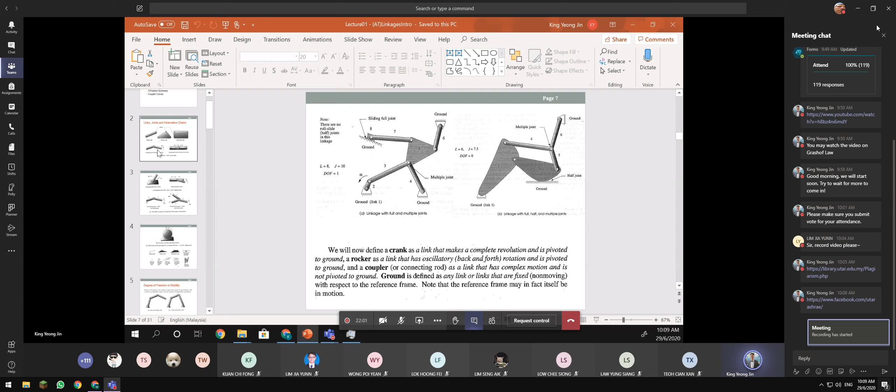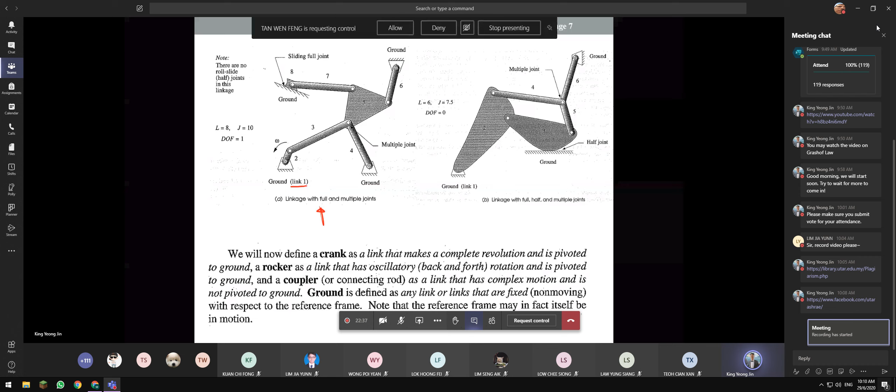Maybe we can look at this example. Let's see - for example, now we look at this diagram. We have so many linkages there, right? So again, you'll find out that the ground link is considered one of the links, because if you look at this part, this part, this part, and this part, their dimension is fixed between them.

So that's why we can actually consider this is one of the links - we call it link 1. Then we have link 2, link 3, 4, where is the one - 5, 6, 7, 8. So 8 is a sliding slider, right? This is what we call a link. So if we calculate it, that's why we get 8 links there.

So now we look at the joint. When we say joint, there is a full joint and a half joint. Full joint basically means that you only have 1 degree of freedom on the joint, in another way of saying it.

So if you look here, link 2 and link 1, or the ground, you can only attach with a pin, so you can only have one rotation motion - you can't have any translation motion and so on. Also, remember we are now on 2-dimensional problems, not 3-dimensional. So this one lays on the screen or paper, so it can only rotate on the axis coming out from the screen. X and Y are fixed because this is a pin joint, so that's why we have 1.

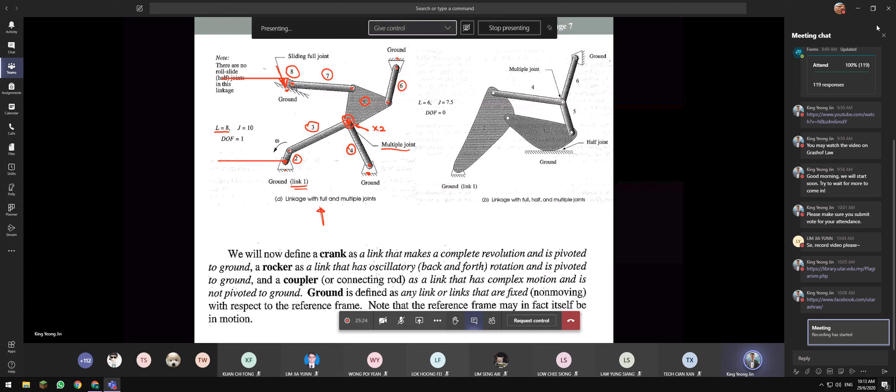Because this is a slider, you can only slide in this direction, so that's why you have a 1 degree of freedom system. That's why the sliding is considered a full joint here. So we have 8 links, then we add 1 more to get 9, and the sliding is the 10th, so that's why we get 10 joints there.

So there is no half joint here. We will look at the half joint on the diagram next to it. So you just substitute all these values.

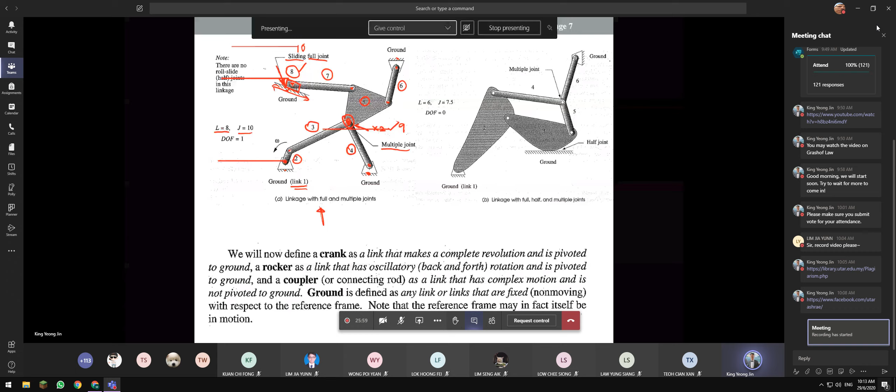To the equations we have. So for example, this one you substitute, this is the 8 link, and this is a 10 joint, this is 0. So we will get 21 minus 20 minus 0. So you will get this... sorry, it should be 1. So we will get 1 degree of freedom system.

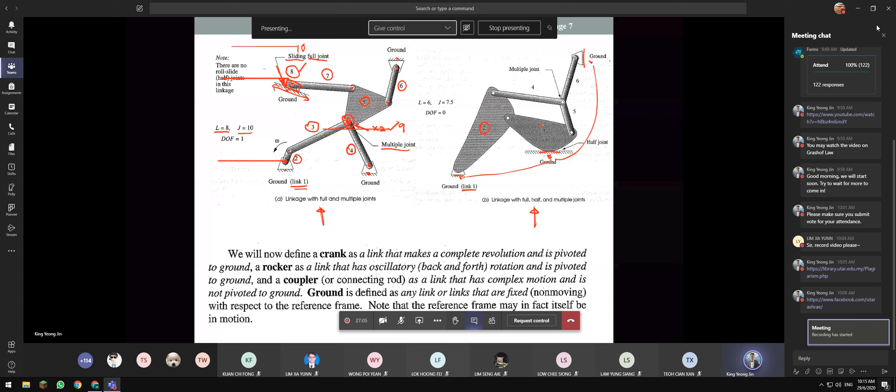Okay, so that is diagram A. Now if we move on to diagram B, you look at the ground here, considered as 1 link, because the measurement from here to here, and to here, they are all fixed. So we have ground as one of the links. So 1, then 2, 3, 4, 5, 6. So we have 6 links there. Then we find the pin joints.

So we have 1, 2, 3, 4. This one is multiple — you can see if I fix this, then I can move this one and this one. So instead of calculating this as one full joint, we say this is a two full joint. So now we have 1, 2, 3, 4, 5, 6, 7. So we have 7 full joints.

So now there is a contact here. So if you see the things that we have here now for this part, it's different from the slider that we have on the left, because that slider only does sliding. But for this link, the link on this diagram, it can actually rotate, it can rotate on this surface, but then this contact can also move horizontally.

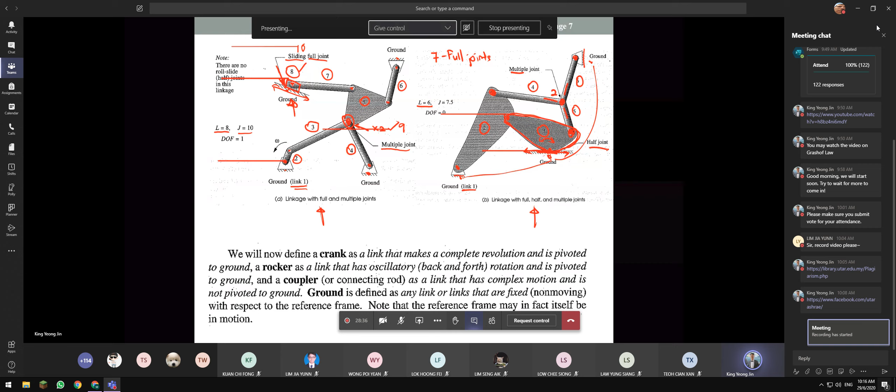That's why we call this a half joint. So half joint, how we denote that is... just a second. So we have one half joint.

Okay, so then if we move back to look at this, let's see what we have. So we have 6 links, 7 full joints, and 1 half joint. So what we get here is this is 15, this is 14, this is 1. So in the end we get 0. So what does it mean with 0?

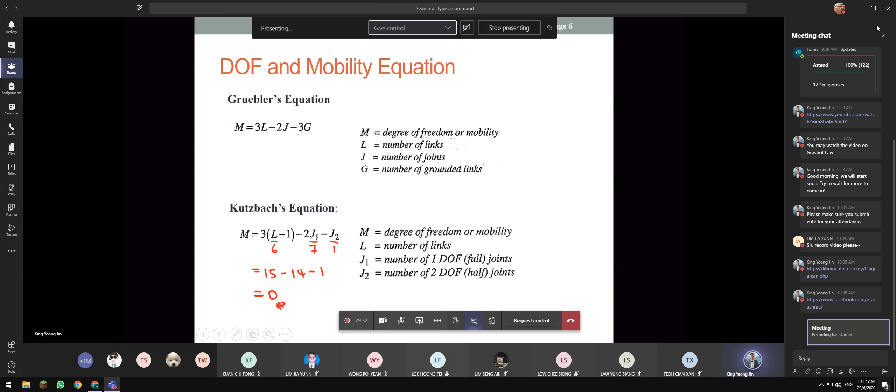It means that if you set up this linkage in this way, basically you can't move it. So it becomes a rigid part, there is no motion you can do. You cannot, when you push here, it will not move. Or even if you push here, it will not move. That's why your degree of freedom is 0.

But for this one, you just need one movement to define the rest of the movement of the linkage. So we read the sentence at the bottom there. We will now define a crank as a link that makes a complete revolution and is pivoted to the ground. A rocker is a link that has oscillatory back and forth rotation and is pivoted to ground. And a coupler, or the connecting rod, is a link that has complex motion and is not pivoted to the ground. So ground is defined as any link or links that are fixed, non-moving, with respect to the reference frame.

Note that the reference frame may in fact itself be in motion. So what it means here is this ground, even though now we say it is a ground, there is a possibility it is a moving ground.

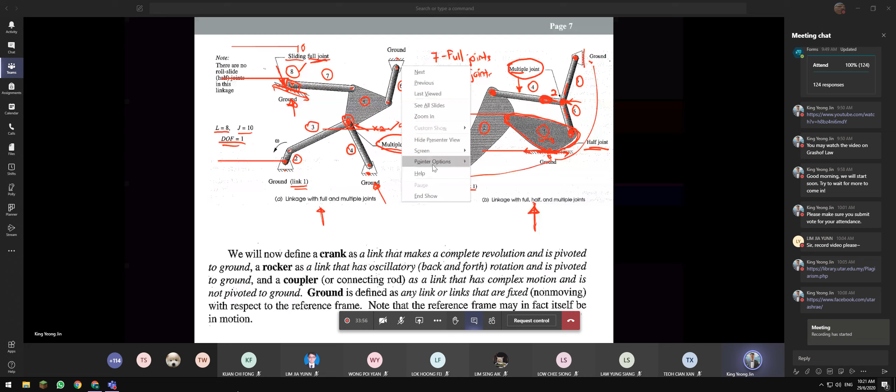At the beginning of the chat, I shared a YouTube video that describes to you the Grashof law. This applies basically to 4-bar linkages, so you can watch the video. As we tried last week already, when I show you the YouTube video it doesn't really work through Microsoft Teams, so you can watch it on your own. It's just a 9 minute fast video.

Now, if you imagine that I turn this, I rotate this, so I will move this point to this direction, this point to this direction. What happens here is, that's why we call this one rocker, because it's only doing rocking, right?

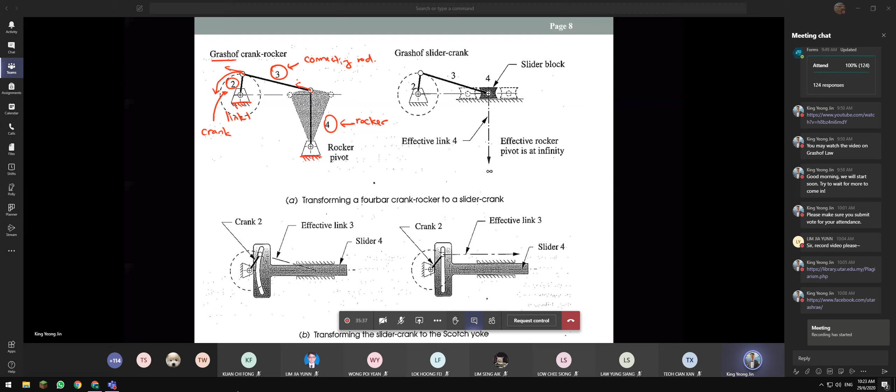This one we call it link 2, normally we call it crank. And this one we call it connecting rod. So if my crank now rotates, then this one, link 4, will do the rocking. That's why you call it crank rocker.

We can have another setup, same as the piston that I showed you in the engine, they call it slider crank linkage. Again the ground is link 1, so link 2 is the crank. If you rotate it, you'll find that your slider block will move forward and backward. The link 3 here is a connecting rod, connecting the end of link 2 to the piston.

The next one, if you look at that, we have this special profile here. But at any single moment, we can actually fix it, and then we can draw the linkages as well. Because if you see here, there is a groove here, and this pin will move along the groove when the crank link 2 is rotating.

If I freeze it at this position, now I can say that my ground is link 1, and this is my link 2. I just take the measurement from this point to the center of the bar there, so I can connect, and then this will form what we call an effective link. The red color one is the effective link, because that is the place where you actually contribute to the kinematics calculation. And then there is a sliding, so we can call that slider 4.

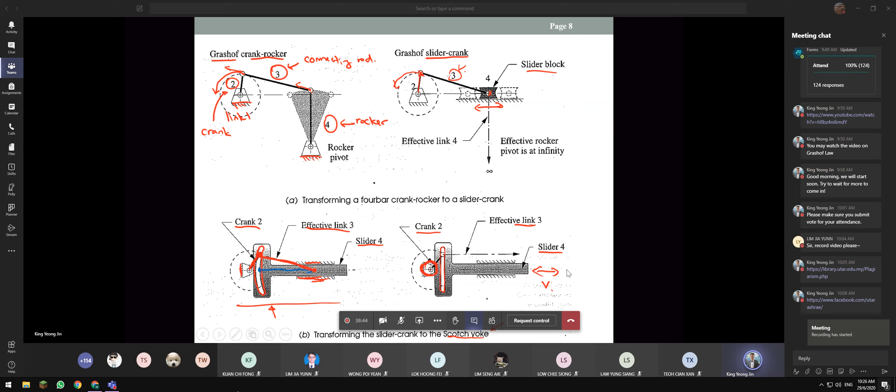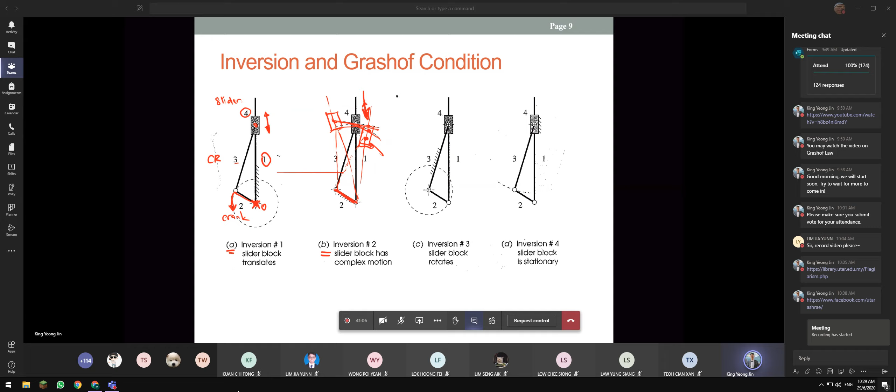For C, what happens if I fix link 3? Then again, my link 2 will do a rotation. When you do rotation, this bar will go up and down, and also it will rotate on that point - this point, because you can try to plot it. For example, now I move to this point, so I have this link here. So what happened here is now I will get that there. Your sliders will actually rotate into this direction.

Now we can look at the last one here, D. So now what happens if I fix the slider here? When I fix the slider here, the link 3 will now rotate based on the P point there. So this is with the same link - if we set different boundary conditions to it, we will get different motion.

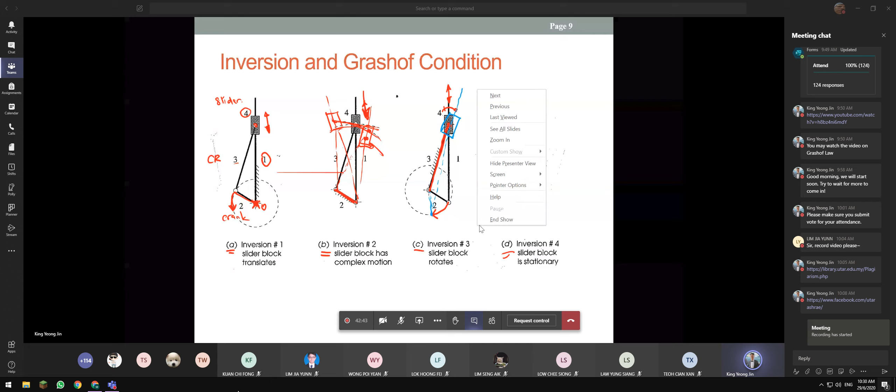Now we look at the Grashof condition. It's a relationship that predicts the rotation behavior of a 4-bar linkage. Before we look into the linkage, a few terminology you have to know: S is the shortest link, L is the longest link, and then P and Q are the other two links. In the video we also explain on this.

Now if we look at case 1, what happened here is the shortest link plus the longest link is less than the other two links. If you look at here, where is our shortest link for diagram 1? This is the shortest link, this is the longest link, and this is the P and Q. So S plus L is less than P plus Q. So what happened here is you will see that you can do this rotation.

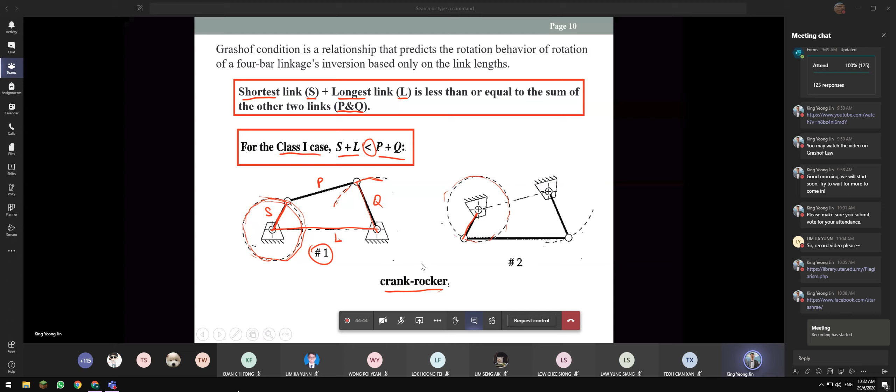So what happened to the double crank? This means that now this link can do a rotation in this way, and then this one can also do another movement. Then we also have a double rocker - now what happens here is these two bars cannot move for full rotation because of the dimension issue, but the two of them will be doing the double rocking.

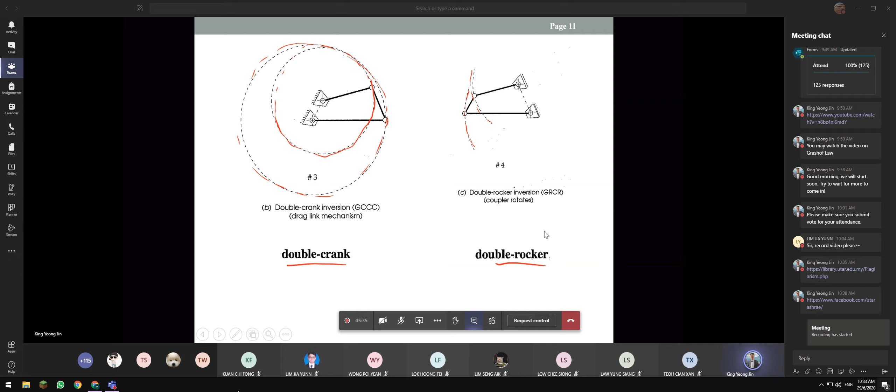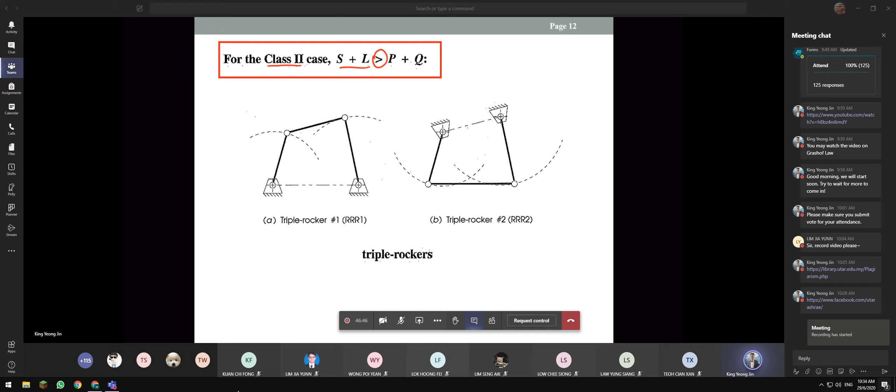So case 3 is when it's equal. We have 3 conditions: we can have this parallelogram form, anti-parallelogram form, and also the deltoid or kite form. This is classified as a special case of Grashof linkage. Case 2 we never mentioned, because we call it the non-Grashof condition.

For those who attended the tutorial, Prof. Andy already touched on this graphical linkage synthesis. When we want to design linkages, sometimes it's easier to use a graphical linkage synthesis method, meaning we can draw it out using a compass and so on. We'll look at the functions, path, and motion generation.

Function describes the mathematical formulas. Path is defined as a point in the plane such that it follows some prescribed path, because the reason we need the linkage is we want it to do certain movement. For example, in your car you have the tank valve, and you want to control how the valve opens. That's why we design the path of the movement.

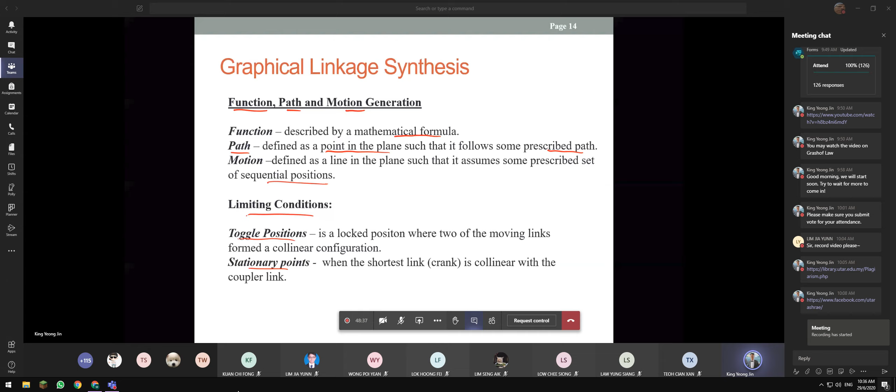Motion is defined as a line in the plane such that it assumes some prescribed set of sequential positions. For the limiting condition, we have two critical positions. One is the toggle position, which is a lock position where two of the moving links form a collinear configuration. The other is what we call a stationary point, when the shortest link crank is collinear with the coupler.

You can also experience the stationary point when you're cycling. If you try cycling, you'll find at certain positions you're not able to move the pedal, meaning that is a lock position where you can't move your pedal. That's why you have to move your pedal to another angle before you can start cycling.

Now we look at what we call the toggle positions. Toggle position means that two of your links form a collinear configuration. For example, here we have link 2, then link 3, and then link 4. Now you can see link 3 and 4 form a collinear position.

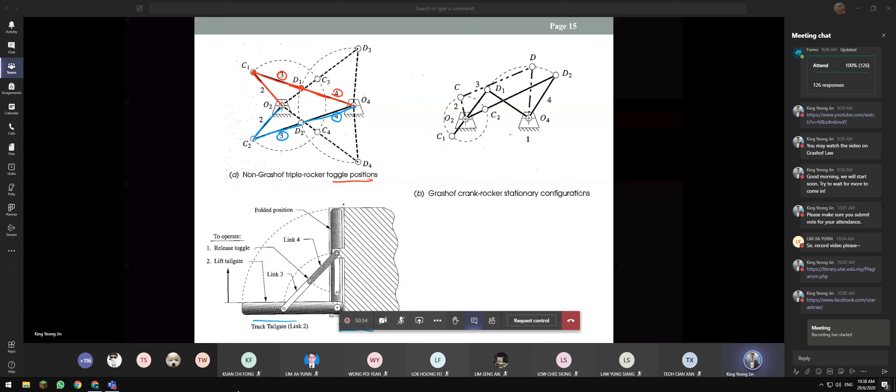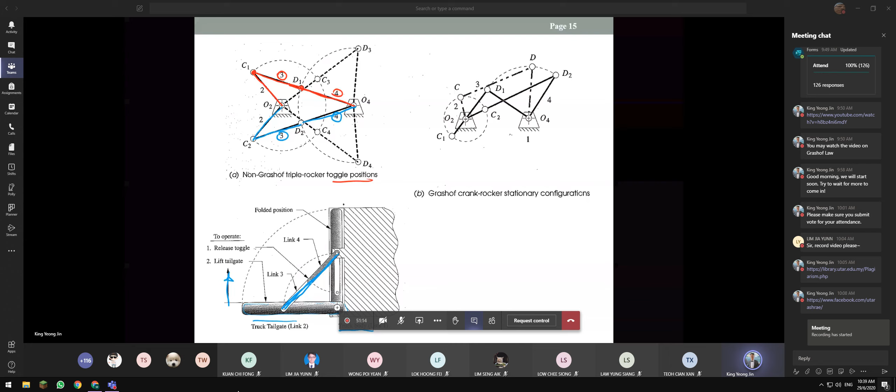You can also see the application here where sometimes we purposely design for this. At the bottom there's a truck body with a tailgate. Sometimes we want to hold it very firmly, so you purposely design these two links so that when you open it up, the two links are at the collinear position, locking it. Now the problem is when you want to lift it up, it's locked and you can't lift it. So normally you have to bend it a bit to change its position, and only then can you start to lift it up. This is one application of why we need to know this.

All right. Yes, anything? No.

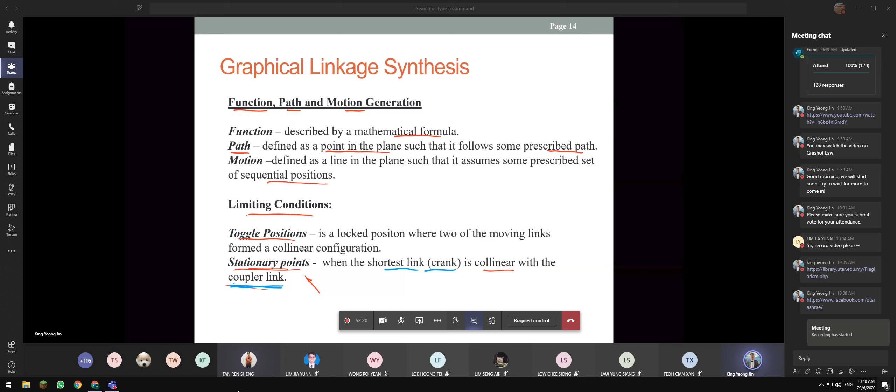So the other one is the stationary position. We defined it as when the shortest link crank is collinear with the coupler. So if this is my crank, the crank is collinear with the coupler or connecting rod. This is a crank, which is link 2, and in another color this is link 3. They are collinear, on the same line. This actually forms the stationary configuration.

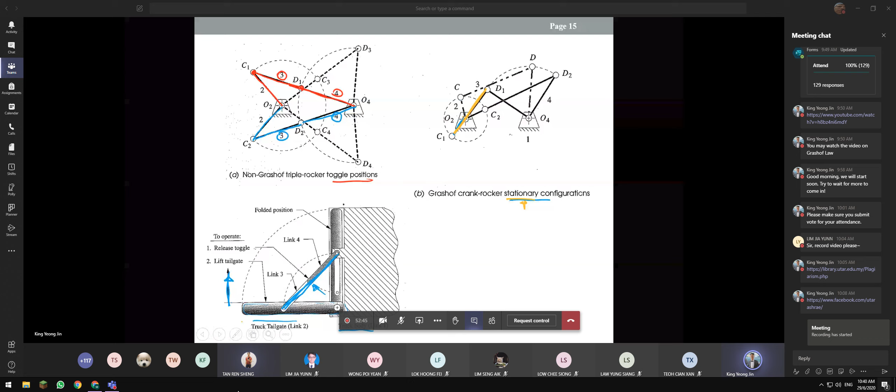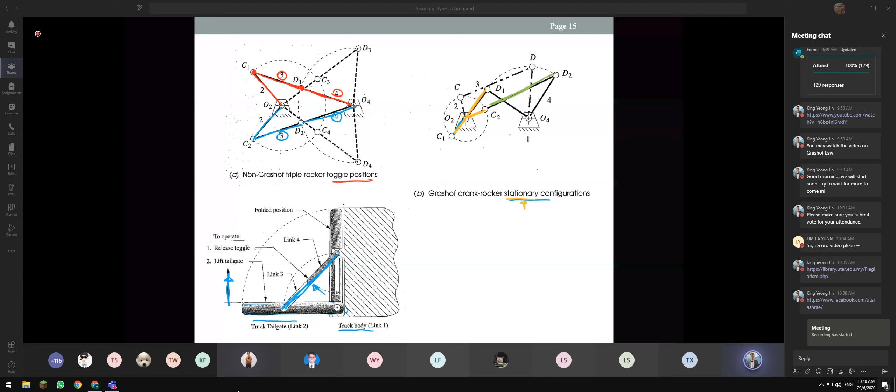The other position is over here. This is a crank, and this is the coupler or connecting rod. They form a collinear position again, so this is also what we call a stationary position.

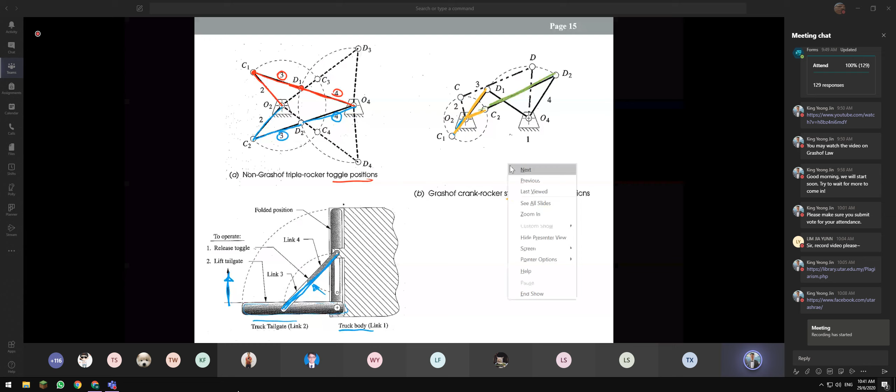Another thing we need to know is what we call the transmission angle, which is the angle between the output link and the coupler. Normally link 4, or the rocker arm, is considered the output link. The reason is that for this kind of linkage, we always place the motor here to serve as the drive, so link 4 is considered the output link. This is the normal condition; you can have it the other way around, but most applications use this configuration, so when we say output link, it normally refers to link 4.

So link 3 is a coupler, sometimes called a connecting rod. What you do is find this opening angle, which we call mu, your transmission angle.

But you have to know that the transmission angle varies continuously. When we turn to the next position, you'll find another new angle here.

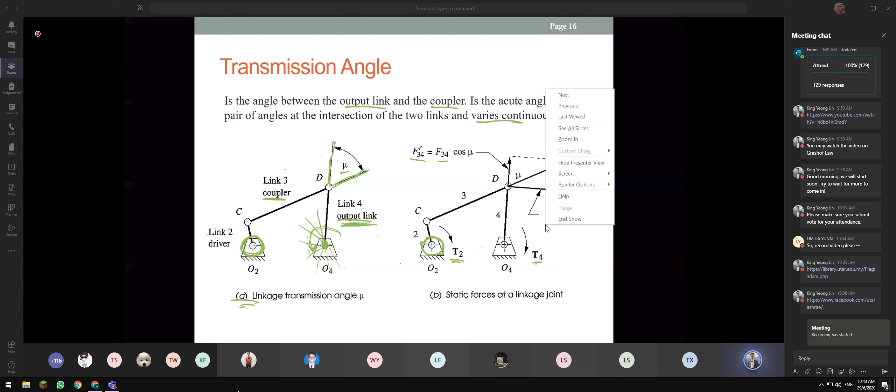Now we move into position synthesis, meaning we can define what our output position is, then start to design our linkage. This is a simple rocker output with 2 positions, with angular displacement function generation.

So we will design a 4-bar Grashof crank rocker to give a 45 degree rocker rotation. So the rocker position needs 45 degrees, with equal time forward and backward, from a constant speed motor input.

So first we will define these two positions by setting this angle at 45 degrees. The next thing you have to do is define the length of this link.

This one you set - how far you want to go. Normally you can set how much distance you want to travel. That's why once you have this distance, you can draw a line across the 2 points, this point and this point.

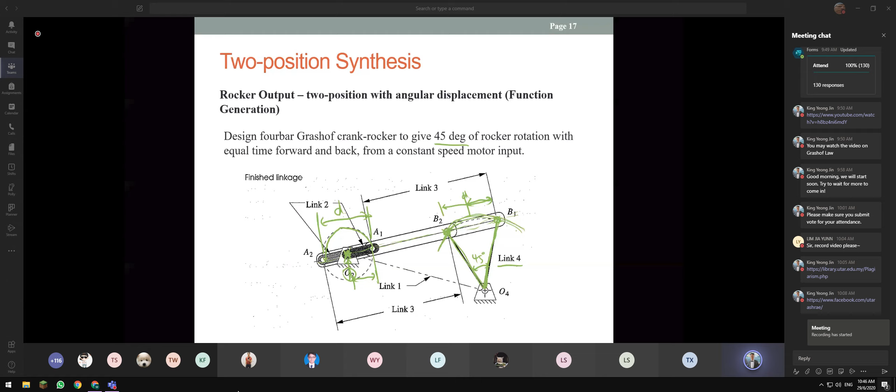So we have to define what output we want, then the length of the link. The other way is you can set it, because once you fix the link, you can draw this line, then cross a line through, then define where you want to put your O2. Once you know your O2, you can define where is your pin for your crank.

That's why then you start to have your crank, this is your crank or the link, and then you connect - sure, you connect to B1, you don't connect to B2, because if you connect to B2, it can't move, there is a minimum position already. So you will connect to your B1, and that is your link.

And then, which color?

And then this will be your link 4. So this is how you build your 4-bar linkage. And if you really want to show it, then this point to this point will be your link 1.

So this is how you get your 4-bar linkages with these two predefined positions with whatever angle you want. But when we have this kind of rocker mechanism, normally, or rule of thumb, the maximum angle we fix is 120 degrees. If more than that, you have a lot of issue with smooth movement.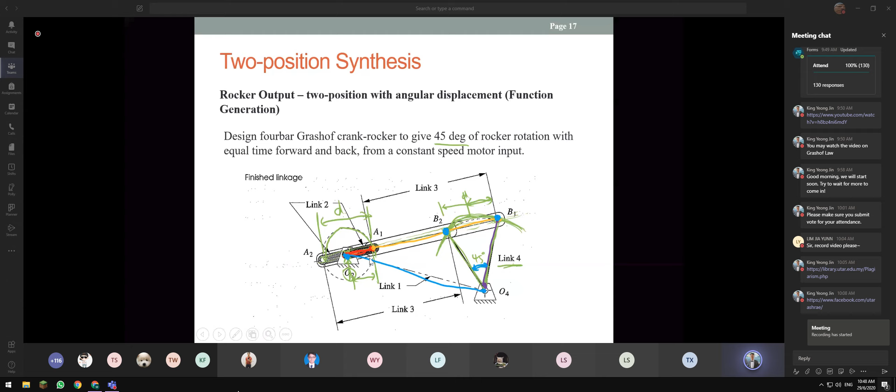You can also see this in hydraulic machinery design, like excavators and so on. They have a similar one. But for this part, they may not use a motor, they use a piston to do the same thing - this two position movement.

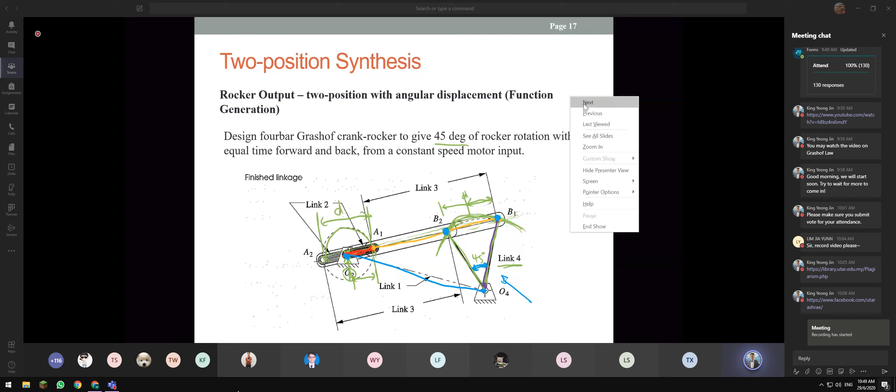So this is how we construct it. Set the angle, and then choose the length - you have to choose the length of this. Then you start to draw this line.

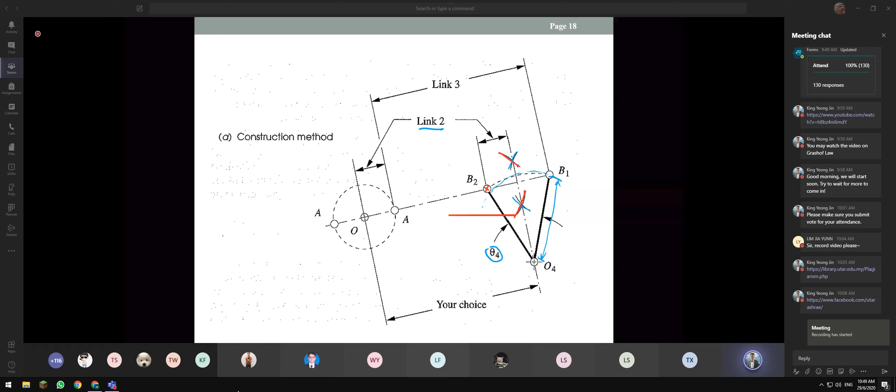Then how do you find the length of link 2? You can use your compass to draw this line. So put the compass here, then start to draw this line and this line. Then put another point, point B here, and draw another line, this one and this one. From here, you break this horizontal line into two, and that's how you get the distance that can be transferred back as your crank length.

So again, this is your choice of length where you go, as I mentioned, governed by the space available in your design.

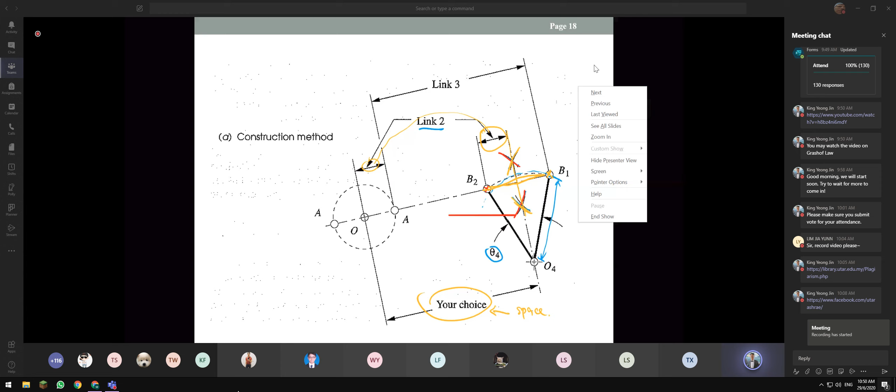So this is a stated method you can follow. We draw the output link O4B in both extreme positions, which is 45 degrees apart. Then we draw the chord B1, B2 and extend it in either direction. Then we can define where our O2 is, along the B1, B2 line.

And then we bisect the line, and draw a circle of that radius about O2. Then label the two intersections of the circle and B1, B2 extended as A1 and A2. Then we can measure the length of the coupler, and also measure the ground length 1, crank length 2, and the rocker length 4.

So then we can check whether it fulfills the Grashof condition, or which case it falls under. If we find this is a non-Grashof condition, we can redo steps 3 to 8 with O2 further from O4, meaning we increase the length of it.

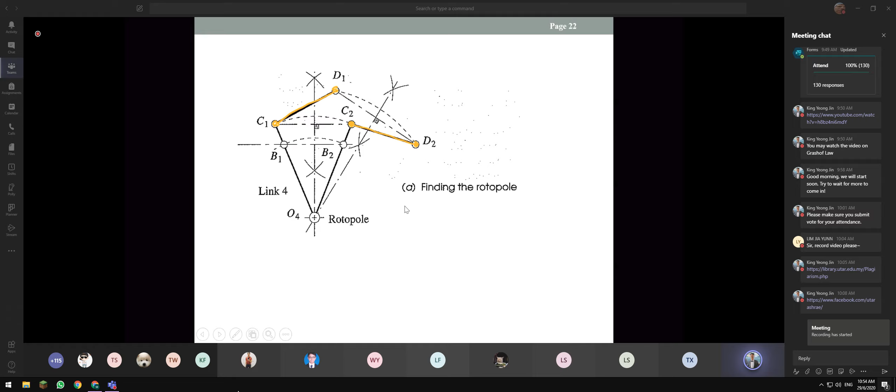So what it is, you connect this. The next step is reconnecting C1, C2, and D1, D2. So what you do is, after this...

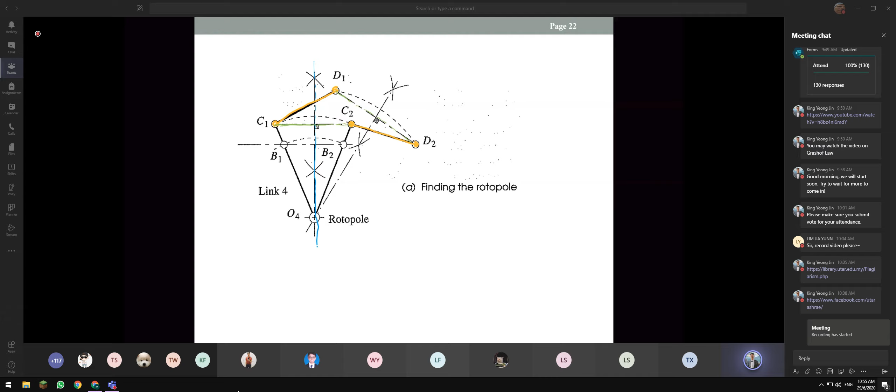Between C1 and C2, you find this line, which is 90 degrees. Also for D1, D2, you find the center line here, 90 degrees. How do you find it? You're actually using this drawing - I hope you still remember how to find the center line using your compass. You can use your compass to draw this.

So then you can form this rotopole here. From this rotopole, then you can connect this to C1 and C2. So that means if this green color one moves from C1 to C2, I will form this motion.

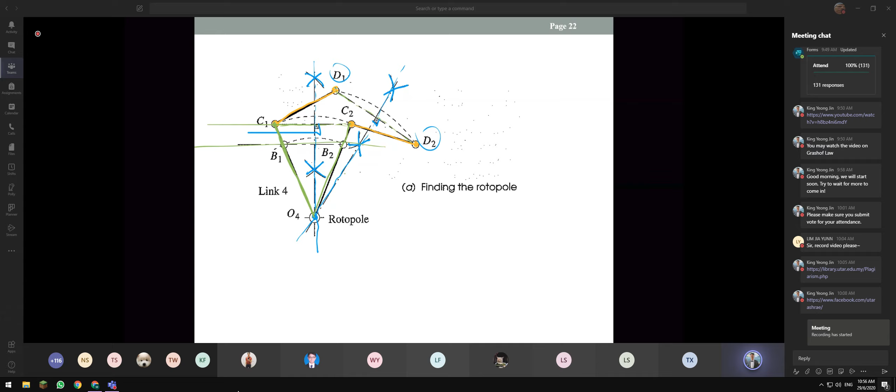After this, we follow example 3.1. You have to find where you want to draw a line across. In this case, you draw it here, B1, B2. If you zoom in here, it will be similar to example 1, where you want it to go.

You can refer back to what we have here, example 3.1. So you draw your O2 and then your crank, this is your link 2, and then you draw your link 3, for example, over here.

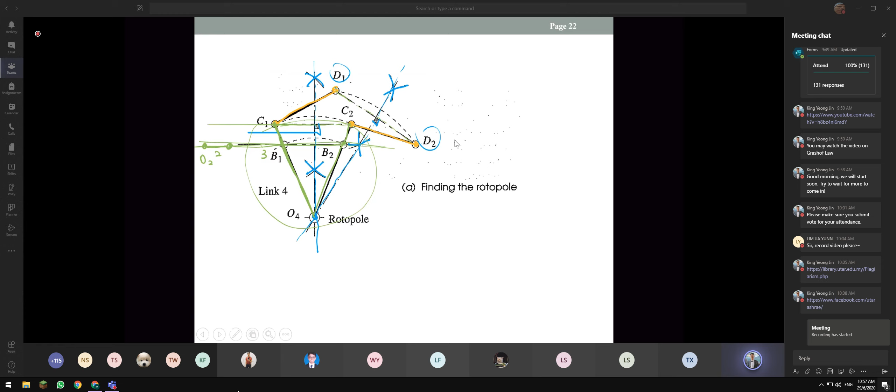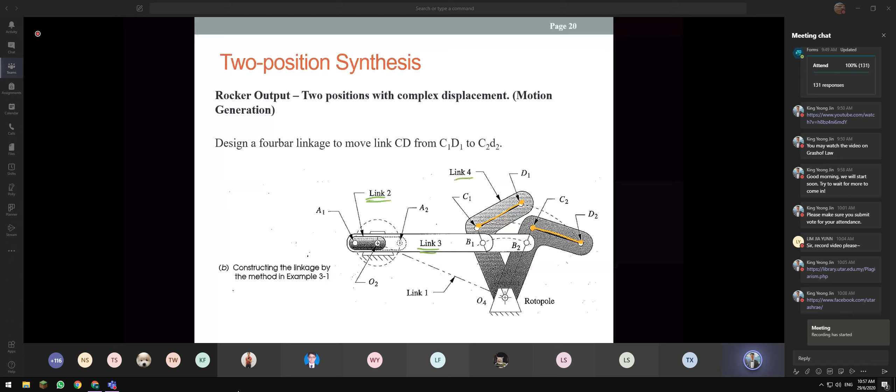So this is another one, coupler output. Just now was a rocker output. If you look back here, this is a crank, this is a coupler, so basically this is a rocker. We call it rocker output, meaning the output is at the rocker.

So what happens if I want the output on the coupler? The question given is still the same. From C1, D1, we want it to move to C2, D2. But now this must be link 3. So what can we do? This is the method we can use.

We can draw the link CD in its 2 desired positions, then draw a construction line from C1 to C2 and D1 to D2, bisect C1-C2 and D1-D2, and extend the perpendicular bisector in a convenient direction. The rotopole will not be used in this solution, so it's slightly different from the rocker output.

Select any convenient point on each bisector as the fixed pivot O2 and O4 respectively. Then connect O2 with C1 and call it link 2, and O4 to D1 and call it link 4. Line C1D1 is link 3, line O2O4 is link 1.

So later you have to look at this, then we can again check the Grashof conditions. If not satisfied, then we can repeat the steps.

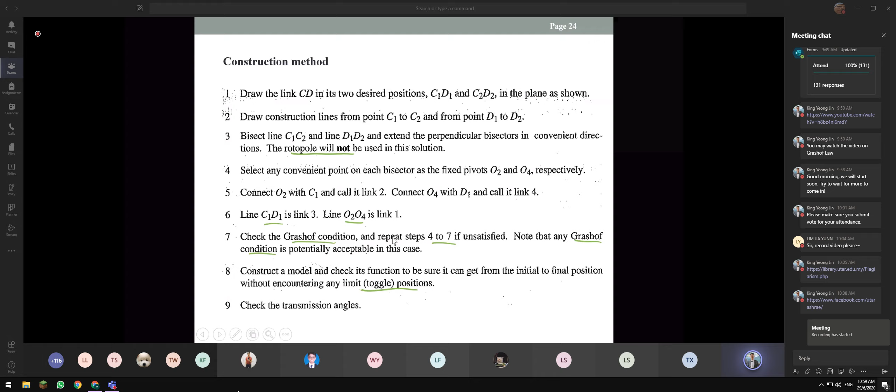But the problem now is basically any Grashof condition is acceptable depending on your application. Then construct the model and check the function, to be sure it can get from the initial to final position without encountering any toggle position or any limit. Then we can also check the transmission angle.

What we have here is we first draw C1D1 and then C2D2. So what happened here is we can then draw this line and find its perpendicular. The other one is over here, finding its perpendicular.

Just now we would take this point if we need a rocker output, but for this case we will not, because we are not working on the rocker output. So for example, on C1 to C2 we have this line. At any point you can set O2 here, or further—it's up to the space available.

For example, we set O2 here, and that's how you build your linkage. So I draw this one—this is your link 2. And now it's not C1—the link 3 is C1 to D1, that's your link 3.

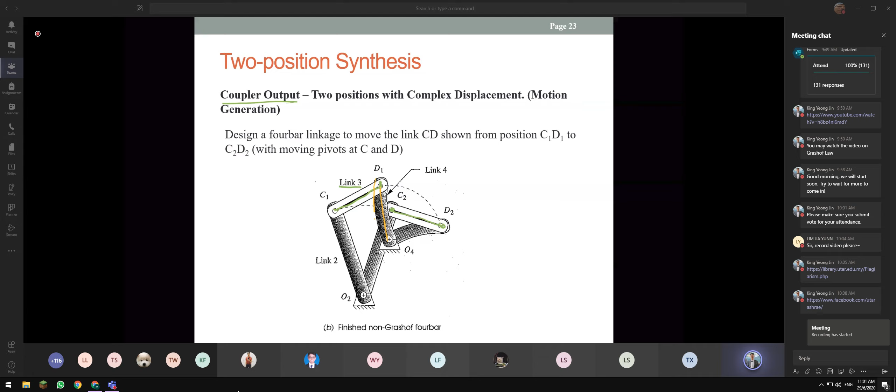Instead of a straight line, you use a curvature linkage. For example, here you see a straight link, but for D1 to O4, the link 4, we use some curvature. This outlook doesn't affect our calculation for kinematic analysis.

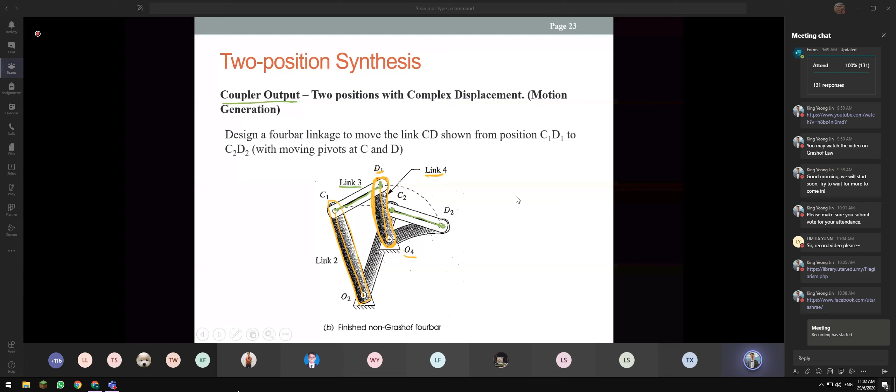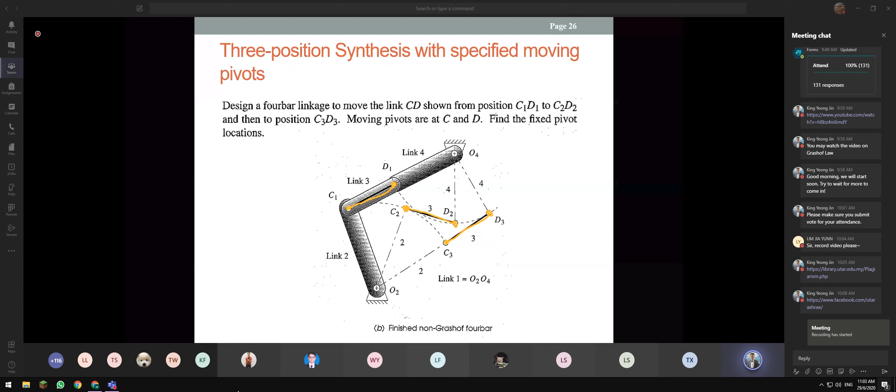So this is the method described. We draw the link, all 3 desired positions, and then construct a line from C1 to C2, C2 to C3. Then we bisect C1 and C2, C2 and C3, and find the intersection there, so we can label it as O2. We repeat the same step for D1, D2 and D3. So again, the intersection that we found will become our O4, or the rotation point of our link 4.

So then we can connect O2 to C1, which will form link 2, and then O4 to D1, which forms link 4. So what is remaining is C1, D1 will automatically become our link 3. O2 and O4, the distance, will become our link 1.

So again, you can check the Grashof condition. Here it is mentioned that any Grashof condition is potentially acceptable in this case, because our movement is on the coupler. So then we can try to check and avoid any toggle position. As I mentioned, once you fall on the toggle position, basically you lose all your movement.

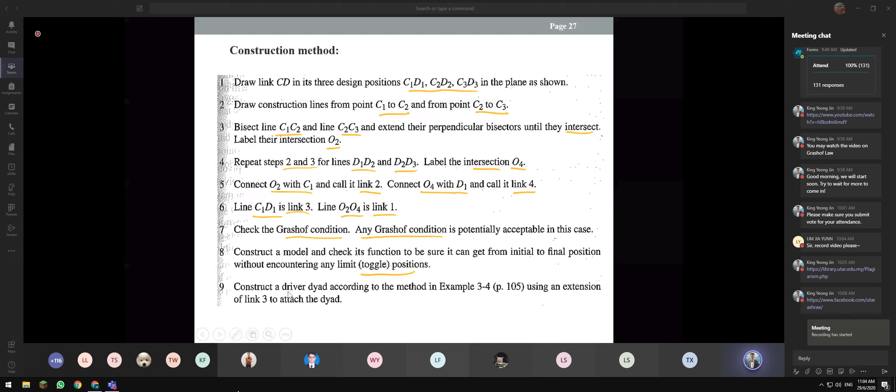So now what he mentioned here is C1 to C2. You draw a line, then you cross it at 90 degrees here. Then C2 to C3, you draw the line, cross it at the center line. These intersections will form our O2. Same thing, go to D1 and D2. You draw the line long enough, because we do not know whether the intersection will be on the top or the bottom.

Then we draw another line, D2 to D3, and find the intersection. This line can always use the compass. Fix this point, draw this line, and this line with the same radius, then fix at D3, draw this line, and this line with the same radius. Then you just join these 2 points. You draw long enough, then you find out that this is the intersection. That will become our O4.

So how then will we actually try to construct the linkage? Because as I mentioned, C1, D1 will be our coupler, so they will form link 3 there. Link 2 will be from O2 to C1. Link 3 is C1 to D1. Then link 4 is D1 to O4. So there is link 4.

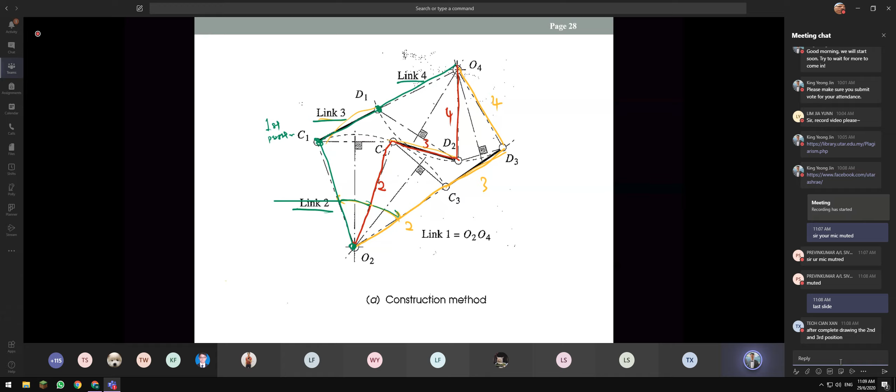So if I start to move my link 2, move from here to here, then the linkage will look like the red color one we have here. I can further move it to the final position here, so it will form the yellow color linkage. So when my link 2 moves back and forth this way, my coupler will always move from here to here and then to here, so it will fulfill the motion.

So a lot of people now move with sensors and actuators, because you can easily put an actuator to move this part, C1 and D1, to this position as well, when you have very good sensors and feedback systems. But linkages are still one of the most reliable, because it won't go wrong. Just like your bicycle, you cycle it normally, unless your chain breaks, there is a hardware breakdown. If not, nothing will go wrong.

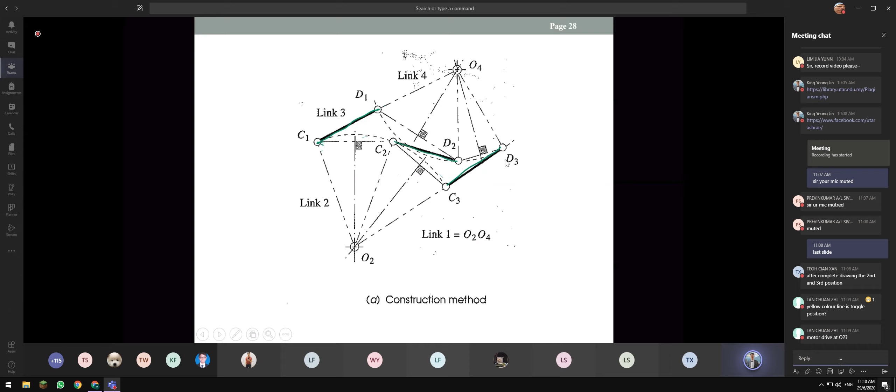So we can move on to another example here. Three position synthesis with alternate moving pivot. Design a 4-bar linkage to move the link CD. So where is our CD? We have CD here, C1 D1, C2 D2, and C3 D3.

Use different moving pivots than the CD. Find the fixed pivot location. So what happened here is now we cannot put our joint on this CD location. Maybe C and D will attach to another mechanism, but we want this point to link to another mechanism at the desired movement position. So that's why we have to choose the linkage to link to another point on the link.

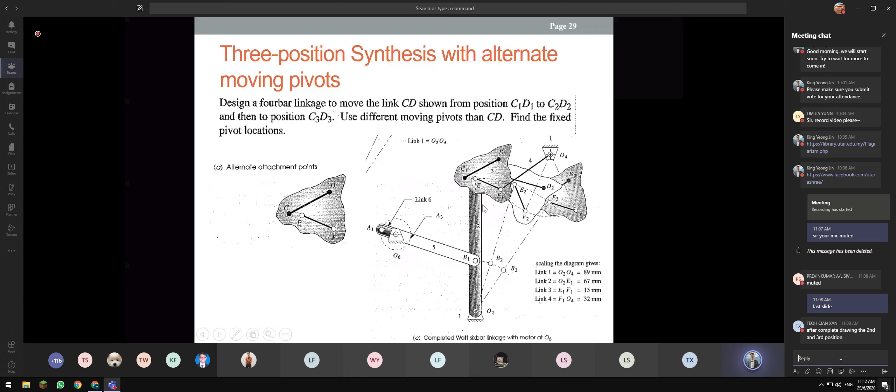So this is the method. It will go slightly longer because now it's a bit more complicated. We draw the link CD in its three desired positions again. Define new attachment points E1 and F1 that have a fixed relationship to C1 and D1. The easiest explanation is we will put E1 and F1 in the same rigid body as C1 and D1. So instead of using C1 and D1, now we use E1 and F1 to define the three positions of the link.

So we'll do the same thing, then we construct a line between E1 to E2, E2 to E3. So maybe we are here. So instead of C1, D1 here, now we find this. So what if you do it manually?

What happens is basically you can draw these 4 points on the paper or on transparent paper, then move it to the second position here, then start to mark the point. So all these dimensions between these 4 points are the same between the first position, the second position, and the third position. So you can also mark this 4 points here, because this CD is what we desired.

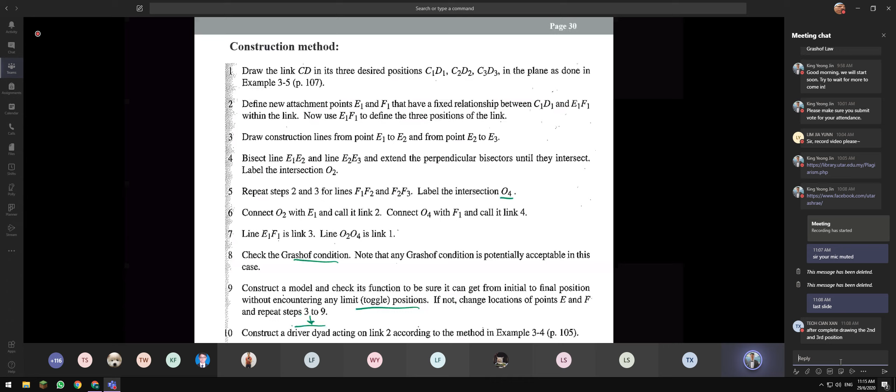Again, the bottom one is repeating the same thing, so we can check the Grashof condition. We can also check the toggle position. So if we need the driver over here, then we can build it according to example 3.4.

So that's why now we will not look at C1, D1. After we mark down where is our E1, F1, E2, F2, E3, F3, we will use this. We will connect E1 and E2, and draw the line. E2 to E3 here, we will get another line. So we find out the intersection is here, which forms our O2.

So then the other one is F1 to F2, we draw a line. F2 to F3, we draw another line. So we find out the intersection is here, which is O4.

So now when we have O2 and O4, then we can start to build our linkage. So that's why O2 to E1 will form my link 2. E1 to F1 is my link 3. Then F1 to O4 will be my link 4. So this is how we get our linkages.

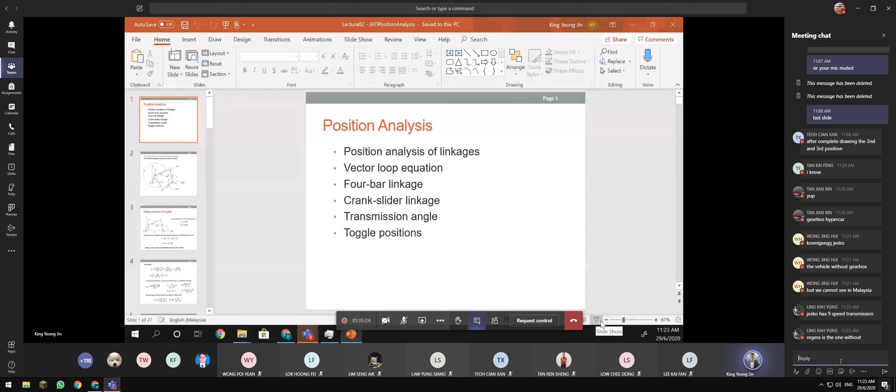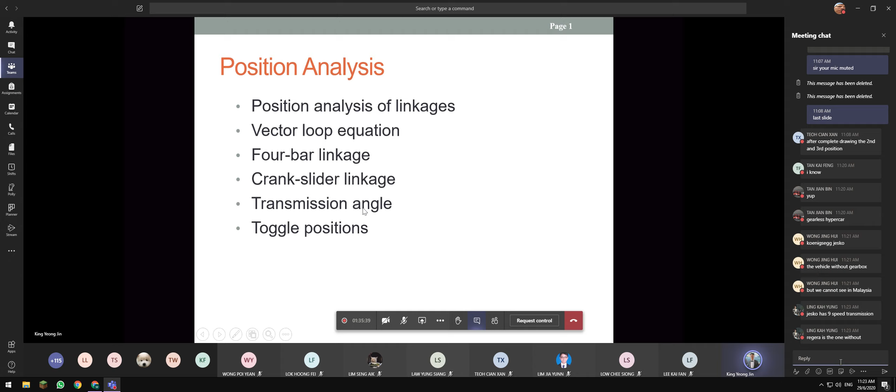Okay, so we'll look at the position analysis: position analysis of linkages, vector loop equations, 4-bar linkage, crank slider linkage, and also the transmission angle and the toggle position.

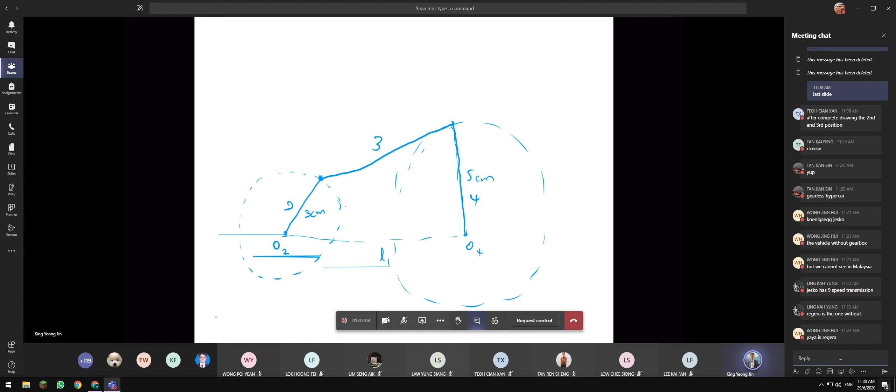When I have that position, I can also say now my link 2 is here, maybe link 4 is there, so I can join it to form my link 3, and so on. This one I don't draw to scale.

If you draw in proper scale, your diagram will look nicer compared to mine. So this is how we can build it, as long as we know the link and its angle theta 2.

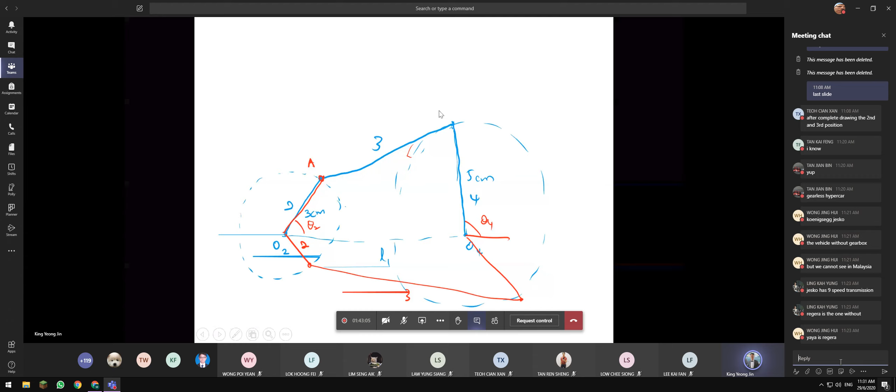So we can find the point A. That's why normally we will try to find theta 2 and the length of link 2, length of link 4, and also theta 4. Then we can easily construct the whole diagram. Or else, if we know all the link lengths with one angle, we can also construct the position of it.

So this is how it looks like. The other one is the second position, the theta 3 prime and theta 4 prime. Instead, now B is here.

So what happens if I set my link 2 again same as here with theta 2. Now my link 4 goes down with theta 4 again, measured from there, from the horizontal line. Then you connect this, forming a new angle here, which is called theta 4 prime.

So where is your theta 3 prime? You have to measure again from here, and that is theta 3 prime. So again, if you look carefully, this point is the reference for link 2, this point is the reference for link 3, and this point is the reference for link 4. That's how you get your angles.

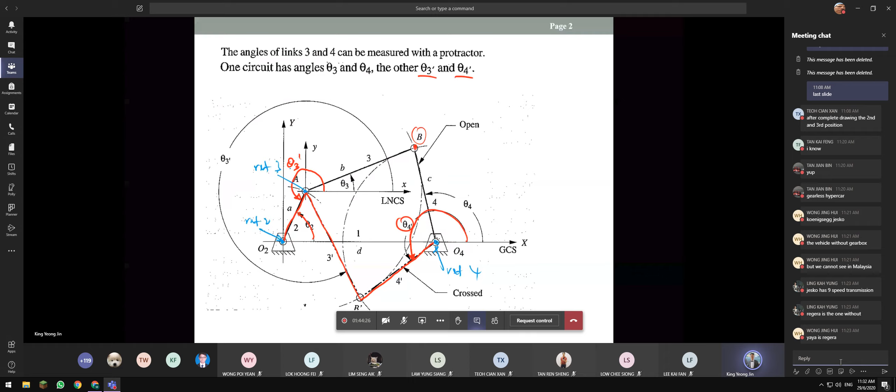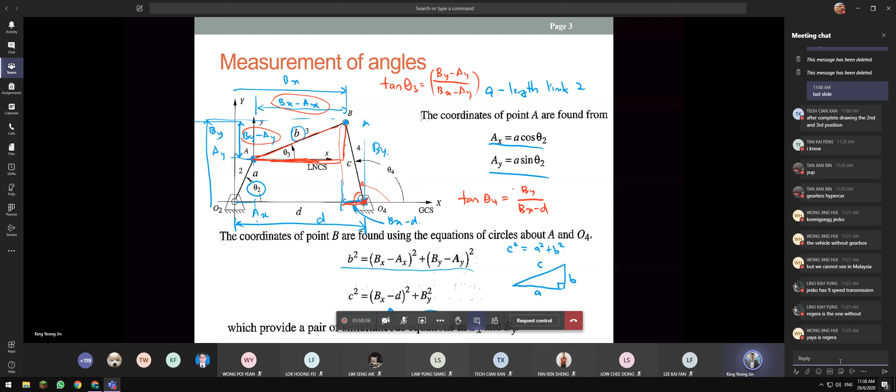Let us double confirm, so this is what we have. For theta 4, you have to refer to this point, because it's measured from this - and since this is exceeding 90 degrees, we will look at this side instead. We take the y component divided by the x component. So tangent theta 4 is equal to BY divided by the horizontal component, which is BX minus D. So that's how we get theta 4. Remember, their reference points are all different.